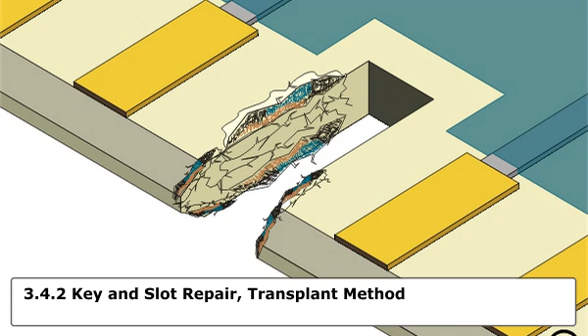This method is used to modify or repair a key slot or other cutouts in a printed board or assembly. A replacement piece of matching board material is epoxied into the area needing repair. A new cut is then machined into the repaired area, if needed.

The minimum skill level needed to complete this procedure reliably is expert. The conformance level reached when this procedure is completed properly is high. See the web page for a list of the tools and materials required to complete this procedure.

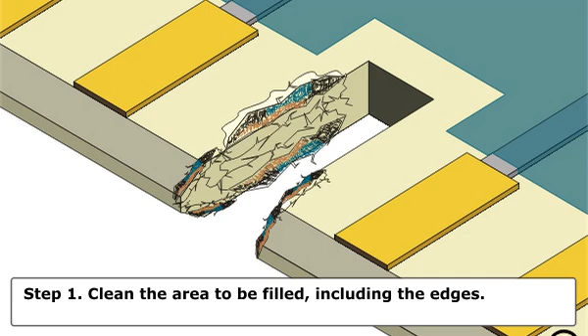The procedure follows. Step 1. Clean the area to be filled, including the edges. Step 2. Mill out the damaged area using a milling machine or precision drill system and carbide end mill. Step 3. Clean the area.

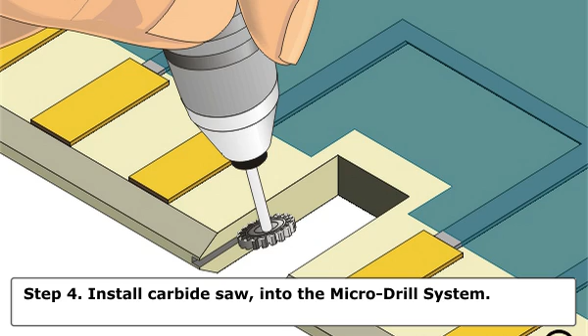Step 4. Install carbide saw into the micro drill system. Set the speed to maximum and machine a groove in the edge of the circuit board where the new base material will be installed. The groove must be centered on the edge to ensure that the new piece will fit properly. The groove width should be approximately 1/3 of the circuit board thickness. The groove depth should be approximately double the groove width.

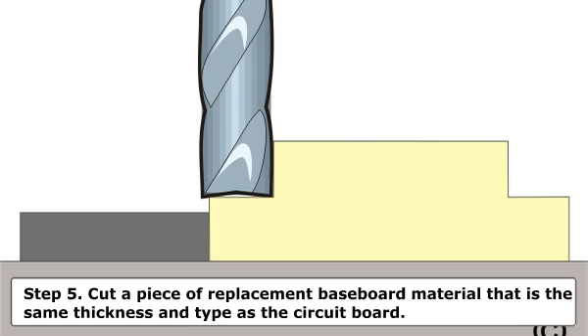Step 5. Cut a piece of replacement baseboard material that is the same thickness and type as the circuit board. The replacement piece should be longer than the length of the slot to allow for ease of handling. Where required, apply high-temperature tape to protect exposed parts of the circuit board bordering the prepared area.

Step 6. Install an end mill into the milling machine. Machine a tongue onto both sides of the replacement piece. The dimensions of the tongue should match the size of the milled groove.

Step 7. Carefully check the fit of the replacement piece and then clean both the replacement piece and the slot. The replacement base material should fit firmly into the slot so that it will not move or fall out when epoxied in place.

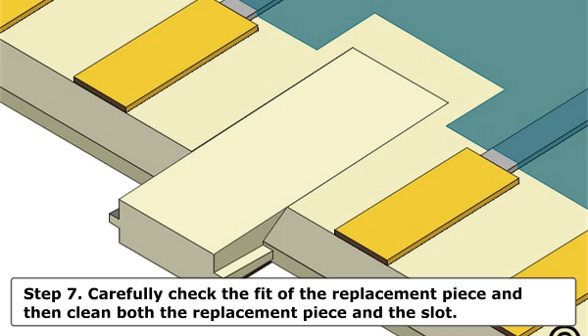Step 8. Apply high-temperature tape to the surface of the circuit board adjacent to the slot. The tape should protect any adjacent contacts or components. Step 9. Mix the epoxy.

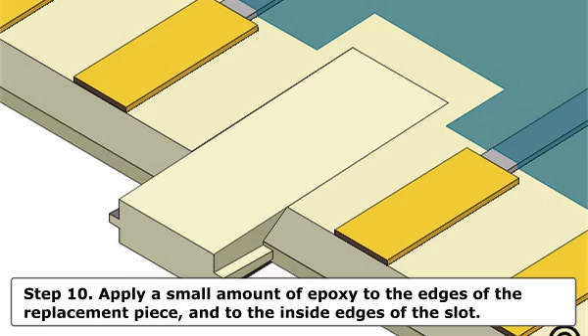Step 10. Apply a small amount of epoxy to the edges of the replacement piece and to the inside edges of the slot. Step 11. Insert the replacement piece into the slot. Check the alignment. Remove the excess epoxy.

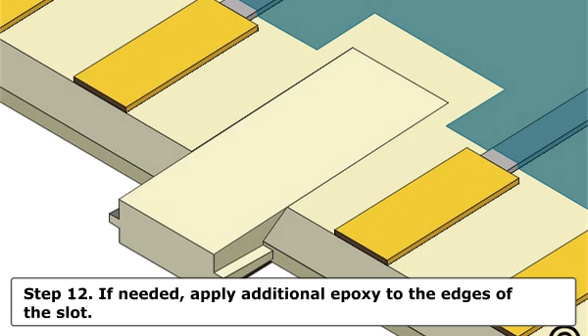Step 12. If needed, apply additional epoxy to the edges of the slot. A mixing stick sharpened at the end may be used to apply the epoxy. Step 13. Cure the epoxy per Procedure 2.7, Epoxy mixing and handling.

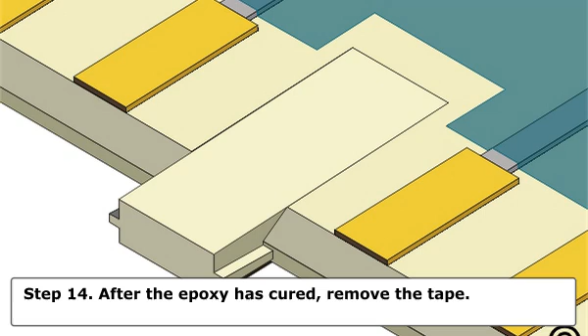Use caution, some components may be sensitive to high temperatures. Step 14. After the epoxy has cured, remove the tape. Step 15. Use a knife or scraper and scrape off any excess epoxy. Note, if needed, apply an additional thin coating to seal any scraped areas.

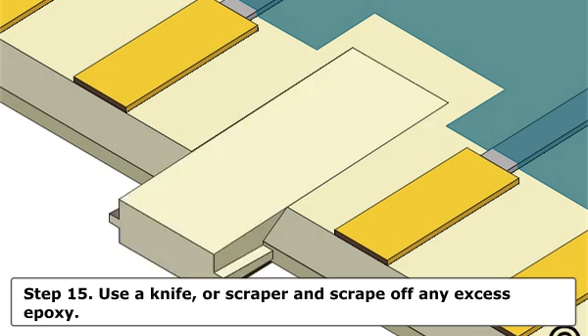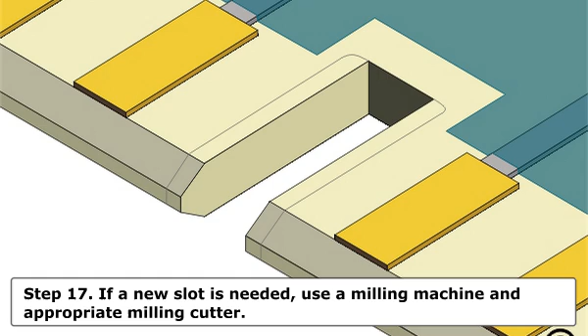Step 16. Cut off the excess length of replacement material and file to match the contour of the existing edge. Step 17. If a new slot is needed, use a milling machine and appropriate milling cutter. Use great care to correctly relocate the slot. Step 18. Clean the area.

Evaluation. Step 1. Visual examination and measurement of key slot location and dimensions are shown.